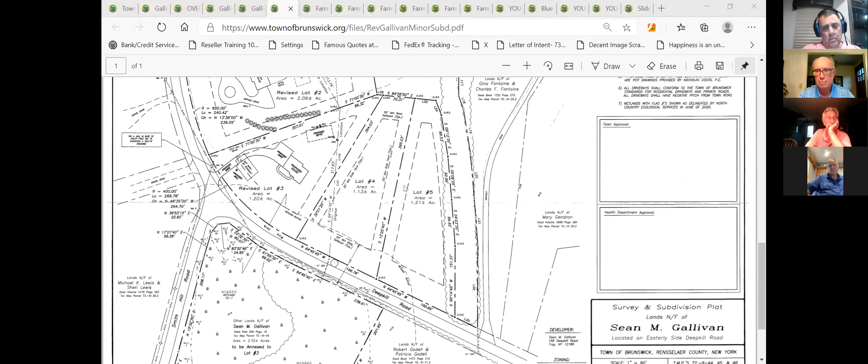Ryan, are you available? Brian Holbritter, land surveyor, here. I am available. We are currently looking at the revised map, which shows the EC wetlands that were flagged across the street on Deepkill Road, and the 100-foot buffer, which comes across the street and into lots 4 and 5 slightly, even with the 50-foot setback line. The engineering firm, Advanced Engineering, continues to work on this project. They are still a ways away from having their septic designs completed and their stormwater stuff. So really not a lot to add for tonight's meeting.

This is Chairman Oster speaking. Thank you, Brian. I'm going to ask Engineer Bonesteel whether he had an opportunity to look at this drawing, and if the revised drawing is satisfactory for him for the wetlands delineation.

Wayne Bonesteel, Planning Board Review Engineer: I did get a chance to look at this. It all looks reasonable to me. Besides the stormwater review, the only other thing outstanding in my comments was revising the wetland buffer limit. So it all looks good to me, just waiting on the additional plans and details for stormwater.

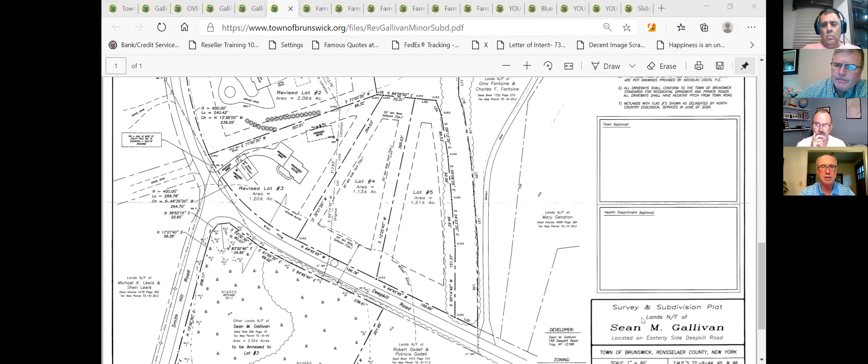Chairman Oster: Thank you. We'll go on to our next item on our agenda, which is the Farrell special use permit and site plan. We were charged basically at the last meeting with formulating a resolution to address all the issues and to respond to make comments regarding the public hearing and so forth. So at this time, unless there's anything else you would wish to add on to this, Brian, I'm going to turn the meeting over to Andy Gilchrist to review the draft resolution.

Chairman Oster: So Brian, do you have any other comments that you'd like to make? Brian Holbritter, land surveyor representing Mr. Farrell: I don't have any specific additional comments unless someone on the board has a specific question that they would like to ask either me or Mr. Farrell. He has joined the meeting here tonight. If there's anyone on the board who has another question they'd like us to answer, we'd be glad to do that. Thank you.

Chairman Oster: I will open up the floor to any member that wishes to ask a question before we get into the resolution.

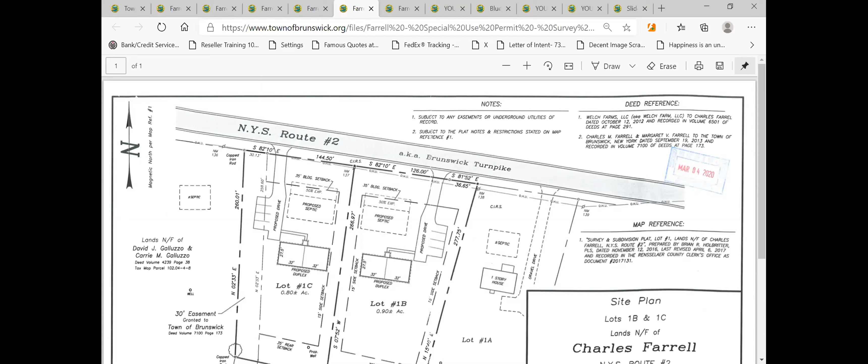This is Member Stancliffe. There was a portion of the resolution which commented on the water supply. Right now you have one proposed well for each lot. I am not sure whether we could request a bond for additional water service, or if there's a potential for the water to be inadequate to serve the two bedroom units.

Having not seen, maybe the engineer has seen it, the water draw report, or whether Rensselaer County commented on that, I don't recall seeing that. Perhaps Engineer Bonesteel has reviewed that. And then my second question was about the proposed driveway and parking area.

It seems that the house was designed to mimic other houses in the area and potentially fit in with the character, but the proposed driveway and parking stalls in the front yard, being as large as they are, seem potentially out of character. If they were screened or divided in some way, I think that would make it more appropriate to the character of the neighborhood.

This is Chairman Oster. In regards to the water service and the bonding, possibly, I would ask maybe Attorney Gilchrist, is that something that we have to consider?

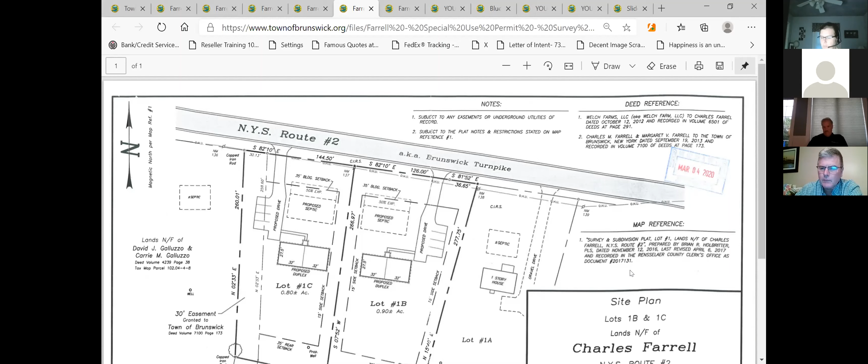So just to get the ball rolling, and this is based on my conversation that I had with the board at the meeting just recently, just at this meeting, I wish to make the motion that based on these findings, the planning board denies the special use permit for this project. Do I have a second on that?

This is Member Henderson, I'll second that. This is Chairman Oster. This was seconded by Member Henderson. I would like to now put this in the discussion mode.

You've heard my feelings about it, and I'm the one that made the motion. So I would like to hear from other members if they wish to proceed in this direction or would like to make another motion, at which point I may entertain the idea of withdrawing mine. So I'll go down the line.

Obviously, Member Henderson has seconded, so I would ask that if he has any comments at this point, he make them. Member Henderson, I have no more comments at this point. Okay, Chairman Oster, Member Krieger. Member Krieger, the only concern I have is with the water and the sewer systems.

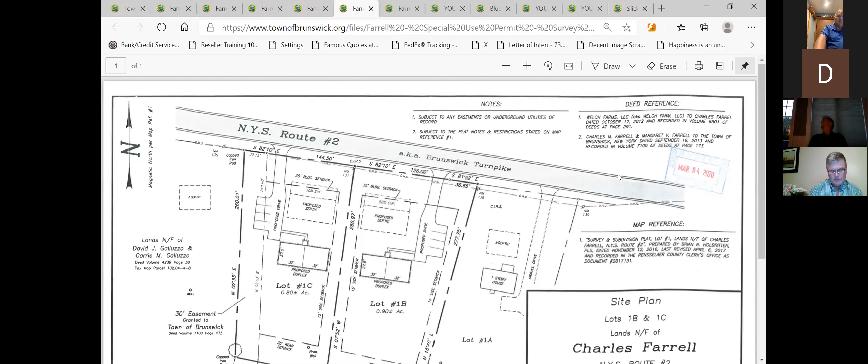Mr. Chairman, you may not like this answer, but that is an issue I'd like to further consider on this overall record, particularly in light of the resolution the board is inclined to introduce. I'd like to have the ability to review that with Planning Board Engineer Bonesteel, and make sure we are acting on a consistent record. So my suggestion would be that the board consider tabling any action on this and let me review that issue with Engineer Bonesteel.

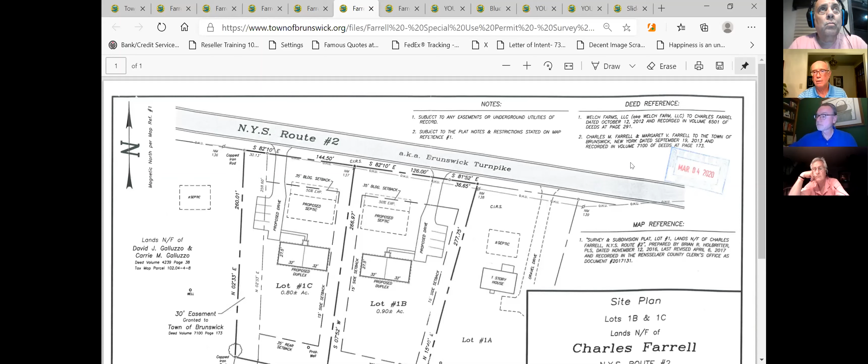This is Member Stancliffe. I'd offer the tabling of this application until the first meeting in the month of August for further review of SEQRA and other documentation.

Mr. Chairman, thank you Linda. I think in lieu of that, I will retract my negative declaration at this point, and we will table the resolution until our next meeting. This will also give some people who had concerns about reviewing the draft a little bit more time.

So I'm going to refer to Attorney Gilchrist on his recommendation to table our motion at this point and address it at our next meeting on August 6th.

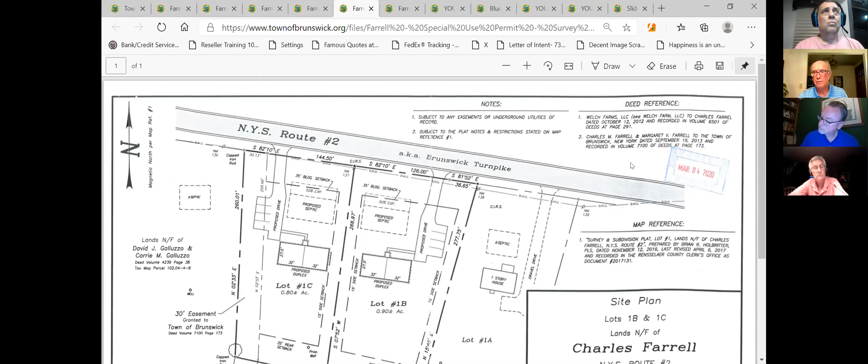Does everybody understand that? Does the applicant understand that? Chairman Oster, yes. So with that being said, we will put the Farrell site plan and special use permit application on our next agenda, which is on August 6th.

By that time, I would assume you're going to give us a little bit of information on your findings between you and Engineer Bonesteel as far as which way that has to go. Yes, we will certainly coordinate with you, Chairman Oster, on that.

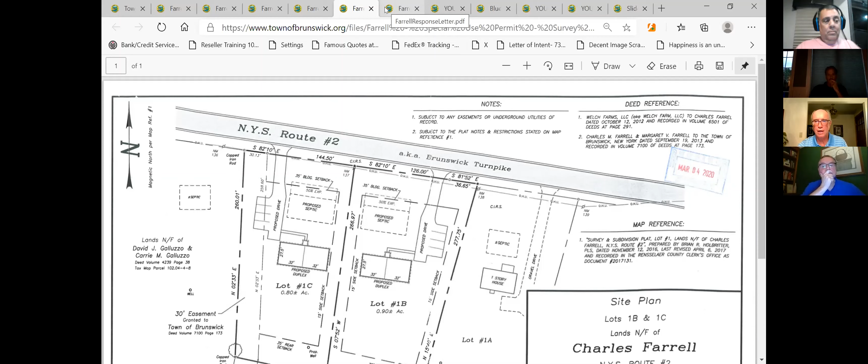I guess that concludes that business tonight, and we will now move on to our next agenda item. Do we need to second the motion? The motion to table? Yes. That's a good question.

There is a motion on the floor to table the resolution and the SEQRA review. I'll entertain a second on that. Member Peterson, I will second that. Okay, we will do a roll call vote on that, please.

Attorney Gilchrist, on the motion to table consideration of the resolution until the August 6th meeting on the Farrell special use permit application: Member Henderson, aye. Member Krieger, aye. Member Manello, aye. Chairman Oster, aye. Member Peterson, aye. Member Stancliffe, aye. Member Tarbox, aye. The matter is tabled until the August 6th meeting. This is Chairman Oster, thank you.

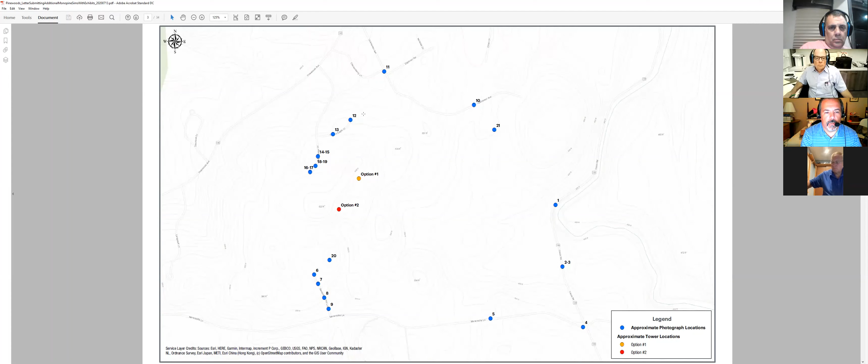We have photos 10 and 11 up in the north end on Coalhammer, and photos 12, 13 through 17 on Golden Eagle Court and Eagle Ridge Drive. There's also photo 20 sitting up here, which was a photo from the O'Brien residence that we took in the fall.

So what was done is these additional photos were all taken, and I'll scroll through them. Where the balloon was visible, particularly in the residential areas, we did a photo sim of those locations so we could provide some additional viewshed information.

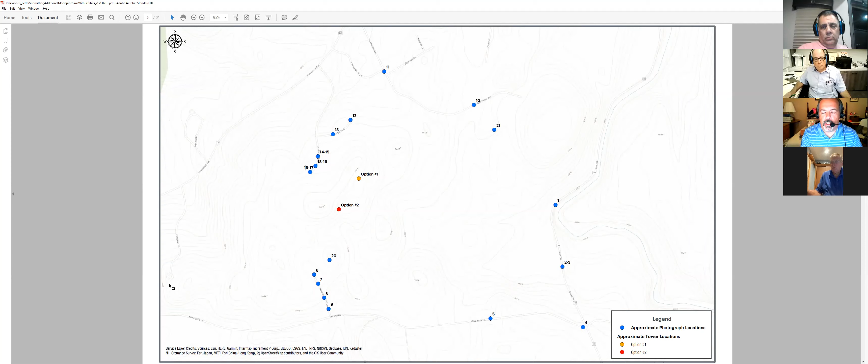So again, this is photo 1 from Crick Road, showing the red balloon, option 2, which is the one furthest south, was visible from this location. This is photo 2, again option 2 is visible, and here's a simulation of what the tree looks like in the distance. We didn't sim every balloon from Crick Road because the concern was primarily from the residential areas, and we had submitted some other sims with the first set from this area.

This is the orange balloon, option 1, at the top of the hill, which has always been one of the alternatives proposed. There's some visibility in the distance from Crick Road. Here we're at the corner of Crick Road and Menemsha, and this is the orange balloon that's visible. If it were simmed, you'd see just a little bit of the top of the tree in the distance.

Again, off of Menemsha Road, looking northwest, there's slight visibility above the trees. If we were to sim this, you'd see just the tip of the tree sticking above. Coming along, we're now going to Sand Cherry Hill Lane, coming up in front of number 9 and 11, and there's no visibility in this photo.

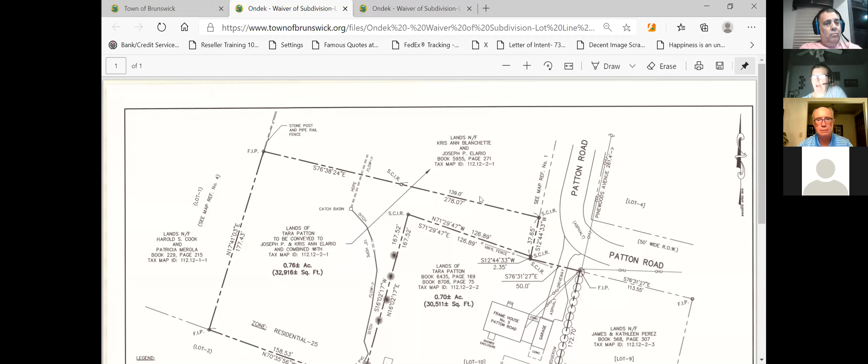Sure, this is Tara Ondek. I'm looking to transfer approximately 0.76 acres of vacant land at 5 Patton Road over to Joseph and Kris Ann Elario, who reside at 228 Pinewoods Ave. And we're doing that through a property line adjustment.

This is Chairman Oster. Okay, Tara, so the whole parcel was sort of like a full rectangle with a small section where Patton Road is angled out. Is that correct? This is Tara Ondek. Yes, it was basically a full rectangle.

This is Chairman Oster. You do have a proper right-of-way into Patton Road, there's access there. Do they intend to build a house on this particular lot, or is this just a property transfer? This is Tara Ondek. As far as I know, it's just a transfer of property. I don't think they're anticipating doing any type of building on the land.

This is Chuck from the building department. There is a spring up above this, and the Elarios were concerned about if someone did build on that, what would happen with the ditch and the catch basin and all that. That was put into that piece of property by the former owners that lived in the home the Elarios live in now, and so far they've had no problems with water since that was installed. If they lost ownership of that property, the new owner could do whatever with that water course running down from that spring, thereby putting their property in jeopardy.

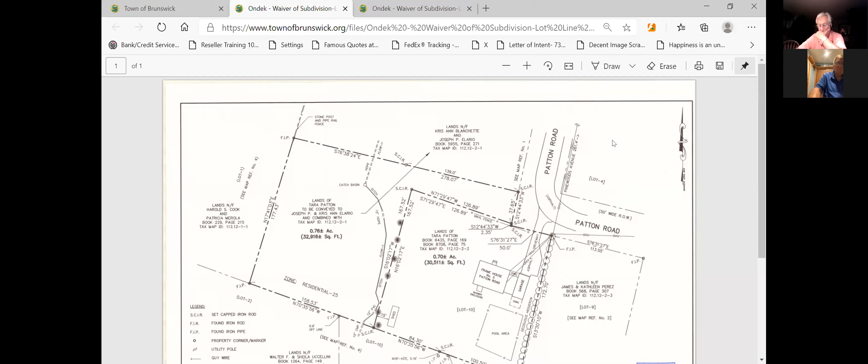The Farrell project site plan and special use permit is also on our agenda. And this, as you recall, also involves what the determination under the SEQR. Andy and Wayne are going to have to address that. And then the Blue Sky cell tower is also on our agenda. I don't believe there's anything else that we had at prior meetings that would be included.

So with that being said, I will entertain a motion to adjourn. Excuse me, Chairman Oster, we have the David Leon development at 666 Hoosick Road who would also like to come in front of the board on August 6th. This is Chairman Oster speaking. Is that an update report, or what exactly does he want to do?

I think I gave you guys enough time to look over the box of documentation I gave you at the last meeting. So he felt that he would give a month for the time of all of that documentation to hit all of your guys' mailboxes before coming back in front of the board. He gave us one cycle, which will end up being 5 weeks for review of all that documentation.